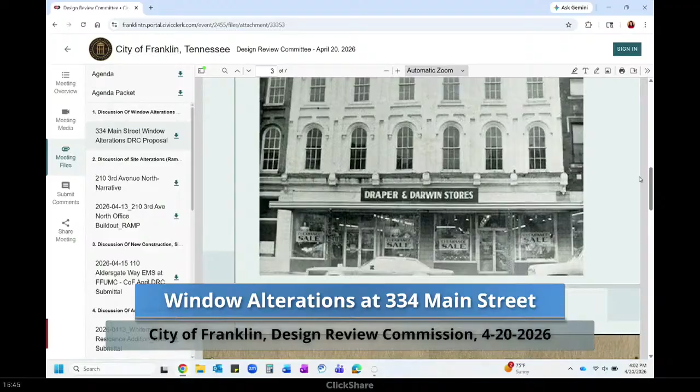Go ahead and give us an overview of your project. As you can see in the picture in front of you, I'm not sure exactly what period it was done, but the original 6/6 windows were replaced by clear pane windows. It was in the mid-90s, and it was a big mistake. The owner of the building is trying to take it back to the picture being shown, which is how every other window on that street is. So we're going to install 6/6 windows and bring it back like it should be. The existing windows are just clear pane.

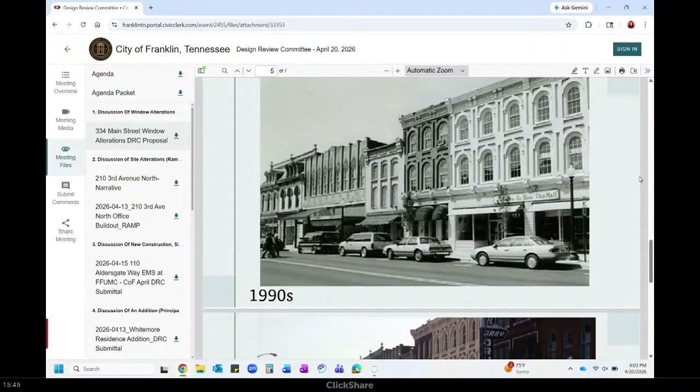They were a mistake, and they've deteriorated to the point where some of them are profusely leaking. Anything else you want to add? Not right now? Okay, let's hear from staff.

Thank you, Mr. Chair. The building at 334 Main Street is in the downtown Franklin National Register Historic District. The building was altered, believed to be in the 1990s, to have windows without a light pattern. The application includes historic images of the building with a divided light pattern, and the windows will be custom made to match the historic windows. The proposal aligns with the guidelines as the building is being restored using photographic evidence.

All right, anyone want to ask questions or make comments? Brian, go ahead. That's great—I can't tell you how many times I've walked down that street waiting for the day this happens. Glad this is the one that gets the call. I feel that way too. The upper stories generally tell the story because they're undisturbed, and this building needs to tell that story. It's very prominent too; it'll really be a facelift to that part of Main Street.

Kathy asked, what type of window is it? They're made to mimic the windows that were there—6/6. The difference is that since there's so much air and fumes from vehicles on the street, they will not open and shut, but they look like true windows. We're making them out of African mahogany, so they probably have like a 200-year shelf life. The profile is a deeper historic profile, matching what was there.

So are you looking at sapele? Is that the type? African mahogany. There was heart poplar there, but you can't get heart poplar anymore, and since they're paint grade, nobody will know the difference. We gave them 2 options: poplar, which would have maybe a 50 or 75-year shelf life, or mahogany, which has a 200-year shelf life, and they chose mahogany.

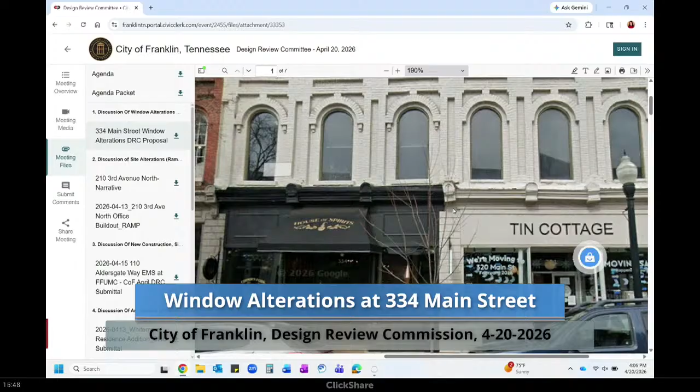And the other side of the House of Spirits has been more maintained, so it's better. But they're requesting, and you can't barely see it from this, you can't see what the covering is, but they'd like to put copper on those eyebrows up there to just take it back to how it should be. Right now, it's just the EPDM over top of the House of Spirits, and then it's like a painted metal over top of the tin cottage.

Okay. Any thoughts on that, anybody? It's not a visual.

So you won't see the copper? What will you not see? Unless you're upstairs looking out the window. So what will you see? Well, let's go back to the picture and see what you see right now. So over the House of Spirits, there's EPDM, but all you can see is the crown. You can't see over the top of it. That side's EPDM, so it's black, and then this side's like a painted metal on top.

If it did, but I doubt if you approved the EPDM on it at that time. It's probably 10 or 15 years, prior owner to the building.

Okay. Now, are you making all the windows yourself, or are you getting them from somewhere? We have a small mill shop we work with. It's just a two-man mill shop, and he does a lot of our work. He'll make them. Good. Yeah, typically we see some window specs when you come for your actual COA.

So if there's a section drawing or anything that kind of shows us how it's put together, like a shop drawing or something, Tyler? Usually there's some type of specifications provided when it's like one of the big manufacturers. Most of the shops we work with are, well, we do a lot with him, but a lot of shops are larger shops, they provide a drawing, but we can provide enough of a drawing for you guys to see what it is, even if it's just what your bottom rail might be and some dimensions and simple things, I think would be what you want, and I can get it to you.

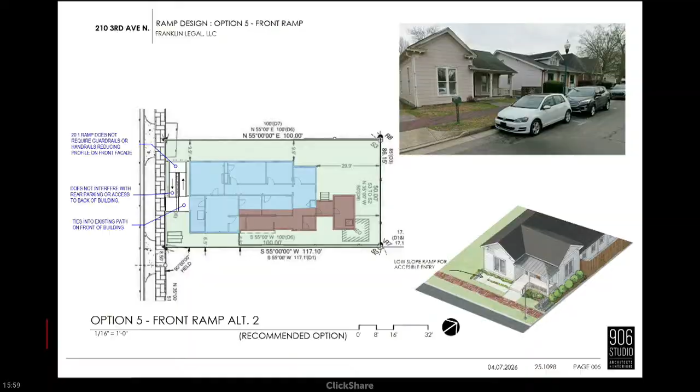What's the front porch to grade? How many inches? We're looking at right around 12 inches. So you're looking for 12 feet of run on the front and 40-something in the back. Correct.

Thank you, Mr. Chair. The building at 210 3rd Avenue North is in the downtown Franklin National Register Historic District. The proposal is to install a ramp on the building. The proposal previously came before a Historic Zoning Commission meeting where it was denied. There are 5 options included within the application. The guidelines recommend placing ramps and lifts on rear or side facades where not readily visible. A project consideration was provided during the review that if the ramp encroaches more than what is allowed by the zoning ordinance, a variance would be required before staff can approve it.

So that last comment was for if the ramp were located past a setback, basically. Yes, sir. Any thoughts, anybody?

Mr. Chair, considering these 5 options, and thank you for the drawings to help us see what you're dealing with. The ramp in the back was definitely too massive, but I understand now because of the slope of the property. The front is the lowest amount of slope. Have you considered a lift versus a ramp?

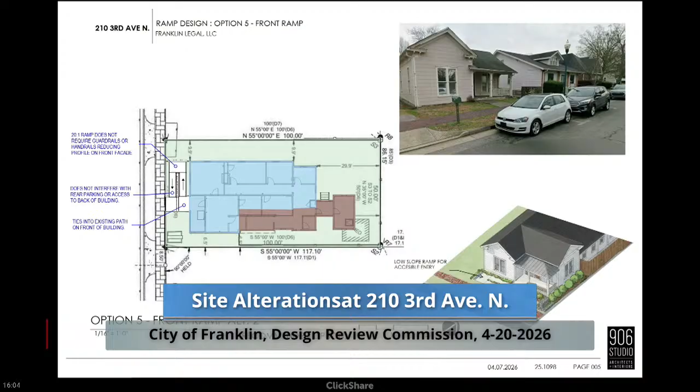Can I ask a question? I don't think the ramp looks terrible at all, I think it looks okay, but if it's only 12 inches, does it have to double back? Is there a way to make it so there's shrubbery right in front of the house and the ramp isn't necessarily right up to it, like a sidewalk that just goes as a single slope? Is that too tall for a single slope?

Unfortunately, at that low slope, to keep us from having handrails and guardrails, we have to have the switchback run. If we went to a single slope, it'd be a bit steeper, which would bring us into the grading that requires handrails and guardrails. So unfortunately I don't think we can shorten that up at all and keep that low slope. We showed it as small as we can go lengthwise.

On your question about option one here, I'm trying to decipher these metrics, I guess that's the north side. We've got 17 feet shared access, and there's a 5-foot setback. I'm realizing that if you do get a ramp on that side of the building, where does it go? You're going to enter in one of the rooms or something, it just doesn't land at a good spot necessarily.

But I still want to understand, it looks like if there's a 5-foot setback, then you've got another 5 or 6 feet to the building. And if you have a 40-inch, 42-inch ramp or some variation thereof, you've still got a 14-foot drive aisle, or am I not understanding? 17's the full width, so is it 17? So we have 17-foot drive aisle, 18.6 to the center, to the property line at the center of that.

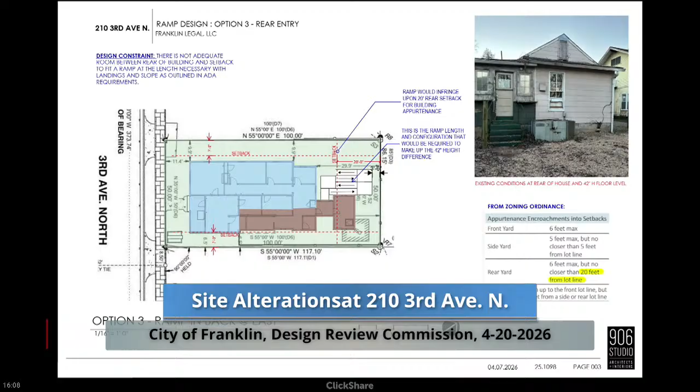Could there be an option to do a lift and a step up to that rear entry? Then behind the building, it's just a lift. We need to look at that. It could be covered and protected, and you could put a parking spot back there instead of this triple ramp.

I think that being the back of the law office, kind of the back of house, the more private part of their operation, I don't know that they'd want to have that circulation path for people coming in through the back. Ideally, it would all come through the front where they have the reception and waiting area. Also for security, that might be a challenge, keeping that door unlocked all the time.

So, not knowing the usage and how you're dealing with the inside, but just since you did look at an option of a ramp going back there, you thought we'll try the back and see. I thought I'd just mention that.

I would encourage you to at least take one more look at the lift. Okay, yeah, we can take a look at that. Thank you, I agree.

Let's exhaust all the options, because if we're going to consider going against what our guidelines say, since this isn't supposed to be in the front at all, then we need to make sure we can, as a board, say we looked at all of their options. There weren't really any other ones that made sense, including that one with the lift. So exhaust everything just so that we have all the information we could possibly consider. I think that helps us make a good decision.

Okay, well, thank you very much. Yes, sir. Angela? Well, I think this is wonderful that you've responded so well to the suggestions and conversations that we've had. And I do think this is moving in a really nice direction that is not obtrusive on the site, but still has its own character and presence. And I do think those details around the door especially are going to be very important. I look forward to seeing those.

Mary? I think it's looking very site appropriate, and I understand getting the final details in. And I would ask that you look to staff on the windows. Windows make such a difference, to make sure you're on the same page with staff on the windows that you select. But as far as fitting in with the site, yes, thank you, and thanks for changing the things you changed.

Madeline? I think we're so close, and I appreciate too that you're listening to the feedback. There's a couple of things, and this may just be time limitations, but there's a few things that scale-wise I'm just not reading correctly, but I thought we had mentioned something about the scale of the windows, the size of those, and the headers meeting at the same point as the door, with the exception of the garage doors, knowing that those have to be larger. And then the other scale thing is the vent on the front—is it going to be that large, or is it?

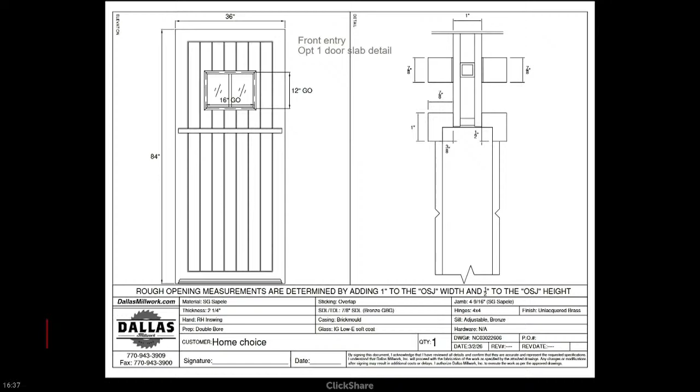So we've come about the exterior doors before, just trying to land that plane on two exterior doors. Would love your thoughts on those. We are looking at, sorry, my screen's so small. Would love to talk about a fence in the front yard. I'd love to talk about our lanterns, just to seek approval on those, and then chimney caps. And then one of the more complex things is we have five daughters, as I think you guys probably know at this point, and lots of cars. So we're trying to think about how we can be gracious to our neighbors and also fit the vehicles on our property that we need to, as they're quickly coming of driving age. So that's kind of the flyover of the things. Oh, and gutters as well, sorry.

Okay. Let's hear from staff here and get their feedback.

We'd like to thank the applicants for returning to DRC to discuss building and site alterations at 121 Myles Manor Court. There are 6 items noted within the application for discussion. I'll go through all of them. For the front and side door, new doors are proposed in the existing entrances. The existing doors aren't historic and are appropriate to replace. The proposed front door features Tudor design influences and is appropriate for the style of the building. The proposed side door is simple in design and features a Dutch door configuration and 9-light pattern. Feedback about the door designs and color options for the side door would be appreciated, as one is shown in a more natural wood finish and one is proposed in green.

For the second item, the picket fencing in the front yard: new front yard fencing is proposed. The proposed placement is unclear as it is shown in this image only fronting Myles Manor Court. Additional information is needed to understand the placement and height on the total front yard, but the proposed design is appropriate.

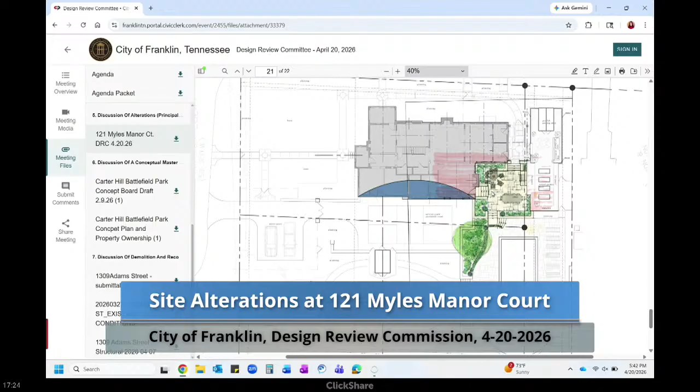Parts of it? It's in the COA, and we're in the process - honestly we were just waiting. I'm trying to figure out what was approved and what's new. I remember looking at the pool and the wall around the pool.

We've had lots of discussions about that - what could be seen as you're driving up before you hit the curve. We would consider a lot of those same things with parking, except the guidelines explicitly talk about parking on the side or rear, so behind that front facade of the house, even on this south lot, could be possible.

I don't know how that's interpreted on a separate lot, but that gets into codes too.

Just to make sure I understand correctly, is moving that driveway toward the green potentially possible - moving toward the rear? We would consider it after the other departments in the city tell us that's acceptable, then we'd consider it for historic site and setting alteration, basically, for us.

But I'm not sure we know enough about whether you're allowed to - I mean, I assume if you wanted to expand your house over onto that, out the side, if we approved that, it lets you do it because it's your property. I just don't know.

Well, you do a final plat then - combine them or whatever. I was going to comment that they would have to consolidate the lots in order to go over.

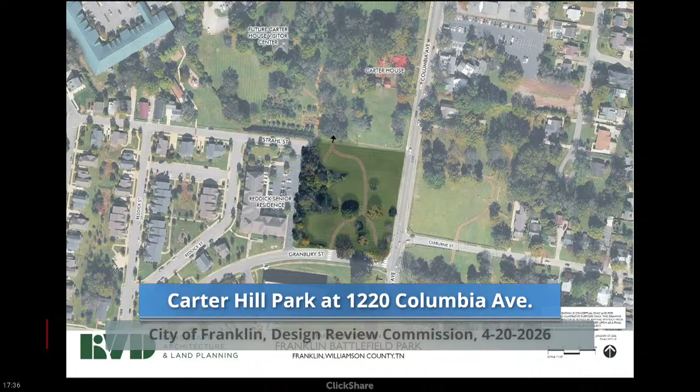Years ago, back in 2013 when we did Carter Hill Park originally, we had an overall high-level master plan in which we could then create a checklist as a department, and also with our partner, the Battle of Franklin Trust, begin to implement that plan. Each year, from volunteers to implementing it within our budgets, we're able to actually make that park come into existence.

So we had the Battle of Franklin Trust contract with RVD, who originally did the master plan and is local here, and this is what's before you this evening.

The goal is to take this a little bit on a road show. I've gone before the Board of Mayor and Aldermen, the Civil War Battlefield Commission. I'll be going before Franklin's Charge, as well as the residents next week around this surrounding area, to meet with them on site and understand that as the park has grown, it also becomes a neighborhood park and not just a historical site for our visitors. I think that's very important.

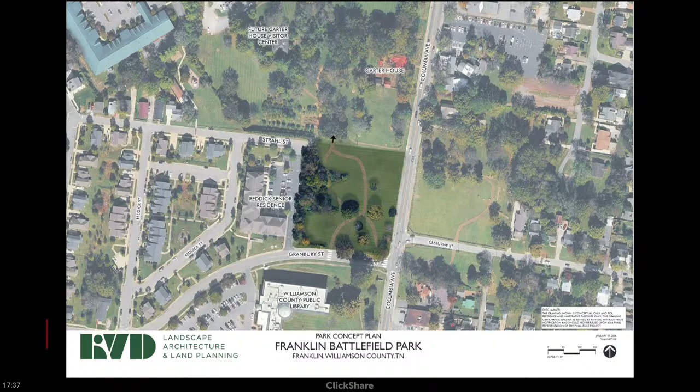What's before you this evening is basically a high-level rendering of what the trails would become. We believe it would match along the opposite side of the road with Columbia. You'll have the split rail fencing that we're known for with all of our battlefields. But there have been some requests that, as you build a Civil War site that is very unique.

We have requested that more picnicking begin to take place. This is right beside residents now, whereas on the opposite side you had to actually walk into the park. This is next to the library. It provides another opportunity for respite.

The Reddick Senior residents are here, and I've been in conversations with several of them, but I'll go before the population next week to ask what is it they would like to see. They would like access through that tree line in some way so that ADA accessibility takes place, and that this becomes a little bit of their backyard park.

From the Battle of Franklin Trust standpoint, our goal is to work in tandem to make sure the future Carter House Visitor Center has an ADA accessible walkway through this park from the new visitor center. That is one of the things I bring before you this evening to speak of: Strahl Street. This whole park is almost dissected by the roadways.

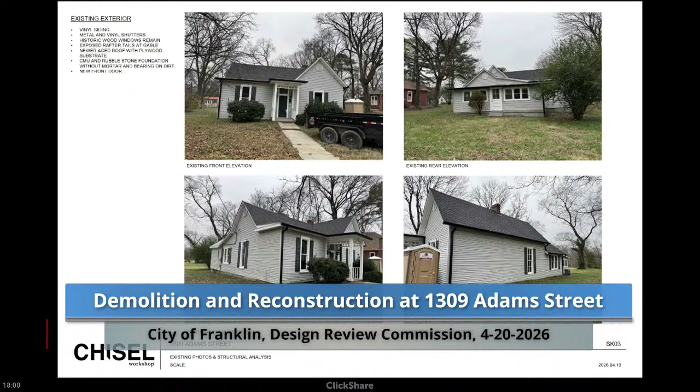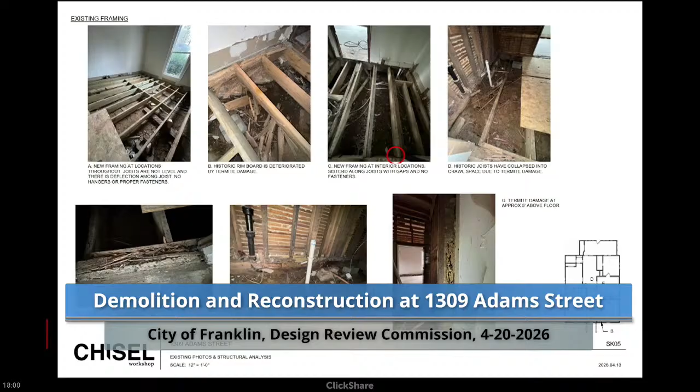Based on this, we are proposing to demolish the structure and reconstruct a residence that closely reflects the historic character, with particular focus on restoring the front elevation, including historically appropriate siding, trim, and reestablishment of the historic front porch. Our intent is to ensure this property continues to contribute to the historic district in a meaningful and durable way. That is all I've got.

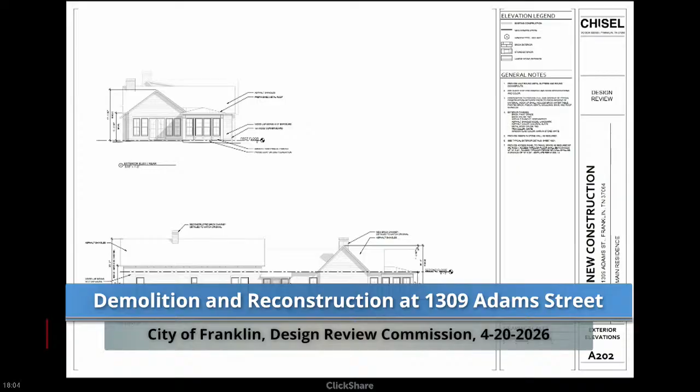For the roof configurations, alterations are proposed to the roof form and pitch at the rear of the building, but the front of the building appears to maintain the historic form and pitches. So feedback about how the change in roof form, as it goes to the rear of the building and to the new addition, is creating a somewhat more complex form than what is seen there today. Feedback on if that is appropriate as it extends to the back.

Windows and doors: a number of new openings are proposed on the historic portion of the building, as well as the pattern you see on the proposed addition at the rear.

There's been feedback and discussion about the transparency of the rear facade and the amount of openings on the back. There's a little more flexibility with windows on rear facades, and they have changed those to better align with the guidelines of being double hung and having spacing and mullions between them.

Moving along to materials and exterior finishes, some additional information is needed to understand the proposed 5-inch reveal, if that aligns with any siding that might be underneath the building or aligns with the aluminum siding. Some additional information about what's existing there today would be appropriate to include in the applications, as well as any other materials and finishes such as gutters and downspouts that are proposed to align with the age and style of the building.

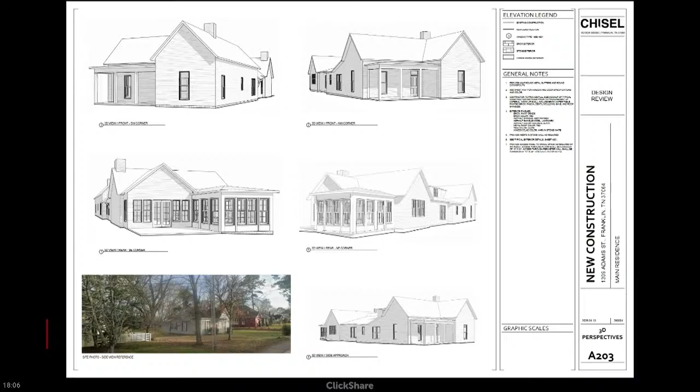For the size, it appears that the addition does meet the size requirements for an addition to a historic building. The addition appears to be about 887 square feet, somewhere around there, but some additional clarification is needed on the patio and porch square footages that were included, and how they're divided, just to make sure we account for everything under roof.

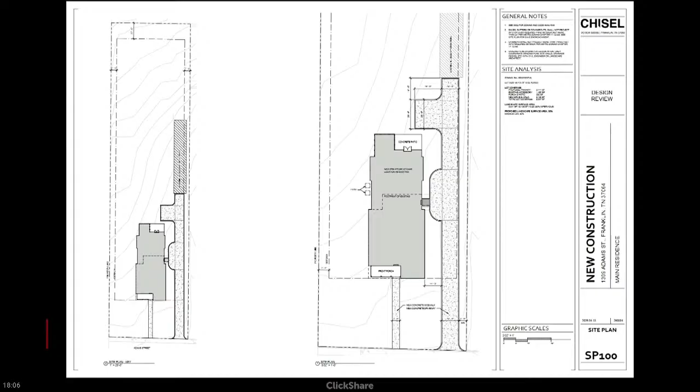For the form of the addition to the historic building, feedback would be appreciated on whether it is clearly inset and clearly identifiable from what the historic building was previously. So there's a lot to unpack there. I'm happy to provide any clarification to any of the comments made. Thank you. Okay, thank you.

Let's talk about demolition first, and then we'll talk about a new house.

Brian, I want to hear from staff. So you said what condition of demolition is met? So one has not been met, so two have and one has not. No, none have been met yet. Okay, so loss of historical integrity does not appear to be met, as the listing in the National Register and what is existing are the same. So it is listed as contributing in the form that it is in. So National Register, they deemed that as historic, and so it maintains that integrity as what's in the listing.

The economic hardship has a list of criterion, additional comments and guidelines that need to be supported with documentation and elements like that. They have supplemented information for the loss of structural instability and deterioration of the property. So that one just requires the structural engineer's report and a report on the feasibility and cost estimates for rehabilitation versus new construction. So that one has been, information has partially been submitted for that one that could be supported by the guidelines if additional information is provided to review.

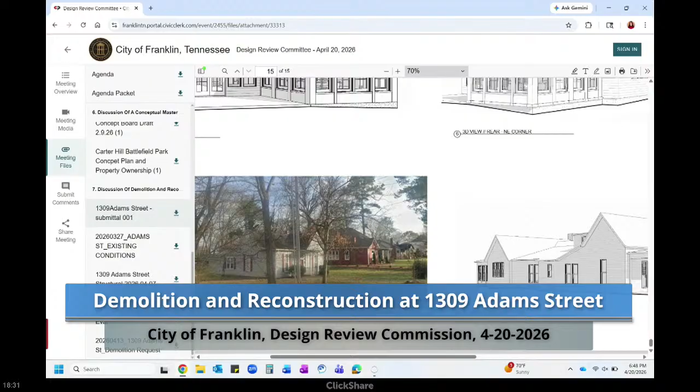You're wondering how much we can actually see from the road. And I think that's where our comments were centered before, how much of this is visible. We tried to show the most extreme view, to say that if you were ever going to see it, this is where you would see it, and you'd see it for just that one split second as you're moving past it. But there's vegetation and other things on the street, it's not out in the middle of a field on its own. So we feel the view of it will be so minimal that most people probably will never notice it. You'd have to be very focused on the house, looking for that thing, to really ever see it. Our intent was to make it as minimal and unobtrusive as possible.

I know we spoke about bringing it back so it wasn't as long, but I noticed it's still as long as it was before. So is there no way to tuck it back further?

It's a question of it, if we keep pulling it back there's no space up there anymore. I guess that's the balance we're trying to make here, can we provide something that maintains the historic integrity and character of the house while providing additional usable space where there was none before, which makes part of this project feasible and desirable for the owner. And it's a stretch architecturally, a stretch for this style of house to have a dormer in that location like that, so that's part of it too.

And you've already got a lot of square footage downstairs. It looks to me like, for the sake of the character of the house and the neighborhood, to remove that space where it is and let the house take the form it would normally have.

I do appreciate that. I think part of it is that because we're making these modifications to it, and it's on the back in a location where really no one will see it except perhaps the neighbor when they're in their backyard, given the size of the lot and the exclusion of the house.

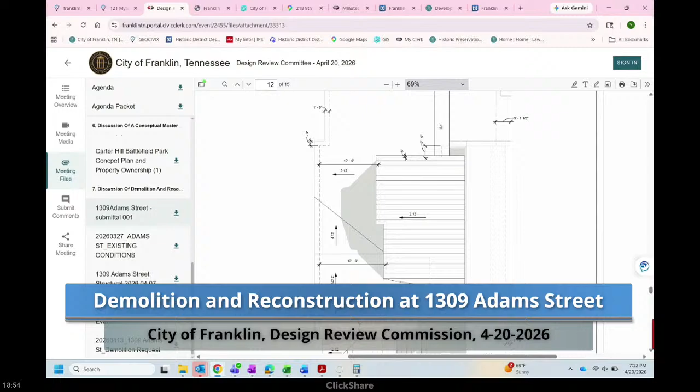So what I'm reading is you've got the T, the original T, that's part of it. And this side over here, like you're saying, is a low shed that comes underneath, but then it hits this low shed which comes up and hits this steeper peak. This is contiguous all the way through here, all the way to the addition. It's got more of that salt box kind of come down. So if there were a section through here, it'd be steep pitch, a little piece of steep pitch, and then a shed. It changes its angle, you can kind of look at it this way.

The 3D image on 203, the bottom one, that line's not supposed to be there. It's just one, sorry. Zoom in on that back piece, bottom right of the last page, yeah. Zoom in kind of right where your cursor is, kind of see it better there.

And so in that instance, because it does shed and change angles, it does continue on that angle to the back. It just kind of does that. Yeah, so where they hit like this, it just keeps going.

And this is labeled, the roof pitch is labeled 9-12, but it's 3-12. It's labeled 3-12 on part of it, 9-12 on the other. But it's 3 to a 9. If you zoom up there... oh right, it is 9-12, I do apologize. Yeah, I think we get it, okay.

I don't mind the roof form, I think it's simpler than it comes off. You got two crossing gables and you got a bridge between, and the bridge is longer on one side than the other. But I think some of those other things that'll help the massing are some of these opening things we talked about. Even some cornice with gutters is going to help bring a level of detail to it. That's like, oh, it starts to look a little softer and livable.

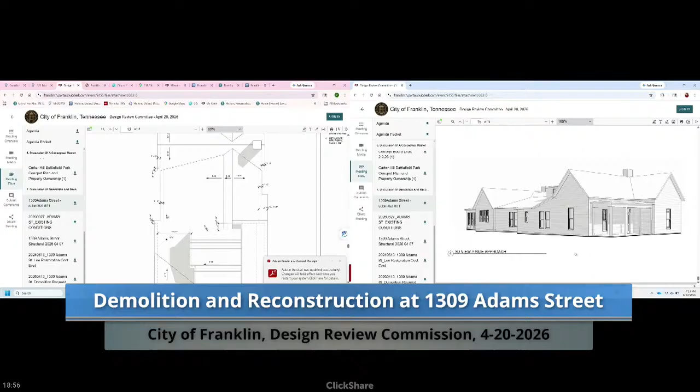Any more evidence of porch stuff you find? I know you're just kind of getting there, but if you find a porch rack or any trim that was left on a porch rack, it's probably not there, but if you find something, or even the silhouette of where a porch rack went into the side wall, it's like, oh, well, at least we know a profile that we could come up with.

I was hoping that it was that kind of detail that's on the existing front little porch bump out. I was hoping we were thinking that's what was there before, and they just kind of put it on the bump out instead, because it does make sense with the other style of homes in the area, looks like the neighbors. So we thought about just taking that, because none of it's long enough to use, but we would have to replicate it to run it as the kind of detailing of the porch.

Are you going to do any of these rafter tail, eave detail things? We do have some of those left over, and we were going to replicate, salvage what's there. Are they just going to be on the front part of the house, or are you going to do it all to the gables? I was planning to run it down on the kind of main elevation of the existing, the original two cross gable. That was the plan.